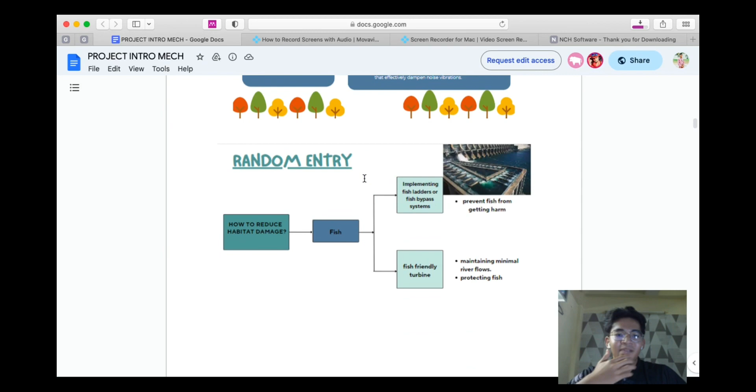For the random entry, we want to reduce habitat damage, so we want a fish friendly turbine to protect the fish and environment, and we want to maintain minimal river flow. We also want to implement fish ladders or fish bypass systems because it will prevent fish from getting harmed.

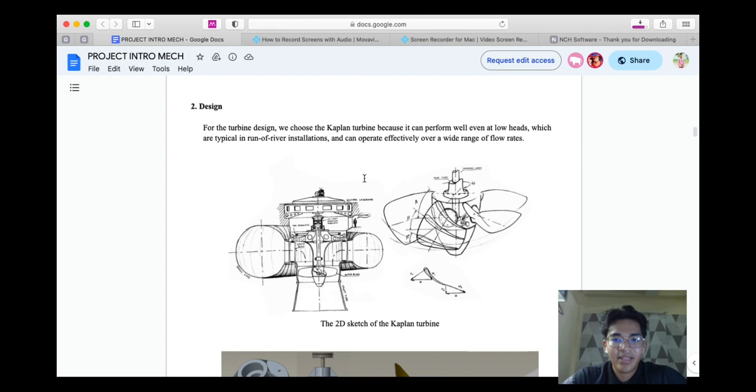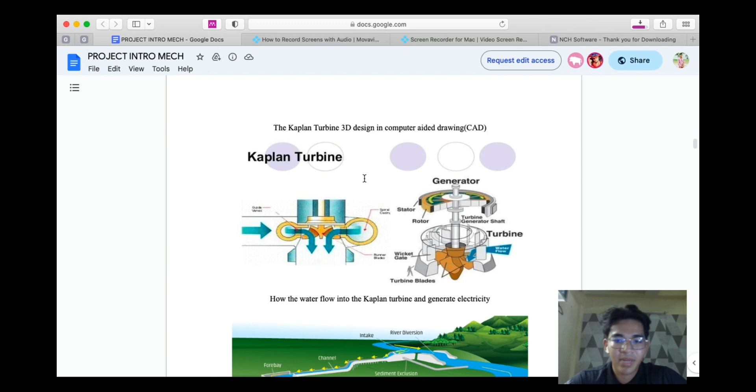So the fish will not go near the turbine. For the turbine design, we choose the Kaplan turbine because it can perform well even at low heads, which are typical in run-of-river installations, and can operate effectively over a wide range of flow rates. This is the 2D sketch of the Kaplan turbine, and this is the Kaplan turbine 3D designed in computer-aided drawing. As you can see, this is how the water flows into the Kaplan turbine and generates electricity.

This is the run-of-river system. Run-of-river hydropower plants harness the kinetic energy carried by water using the natural downhill flow of rivers and micro turbine generators. The turbine we have chosen, the Kaplan turbine, will be used in this hydropower plant system. We chose the run-of-river system because it will help us more and make our project more efficient.

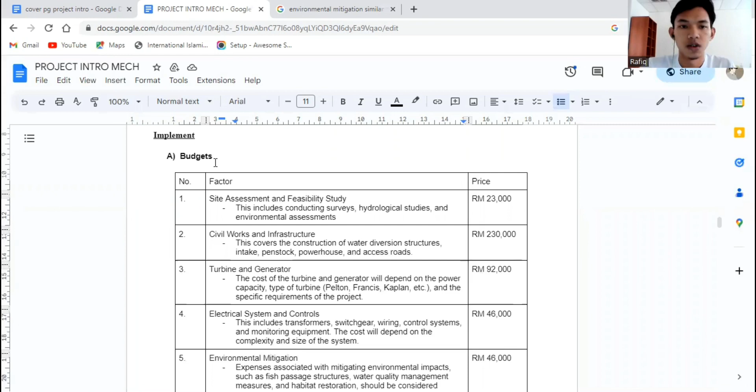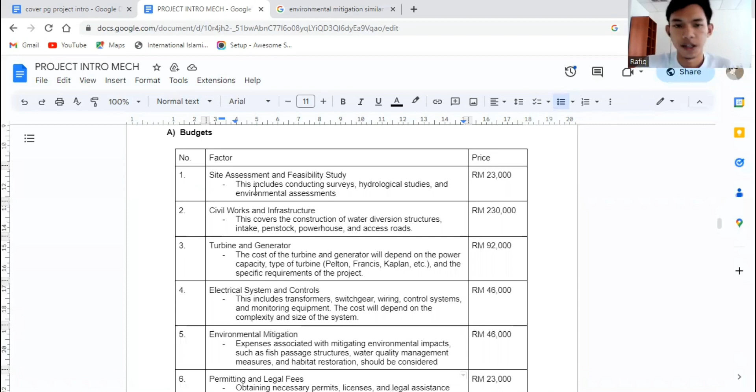Now I will explain about the implementation. My team has considered certain things. First is budget. For our project, a hydropower plant system at the waterfall, I have decided on 6 factors according to the budget. The first factor is site assessment and feasibility study. This includes conducting surveys, hydrological studies, meaning the study of the amount and quality of water stored on the land surface, and environmental assessment.

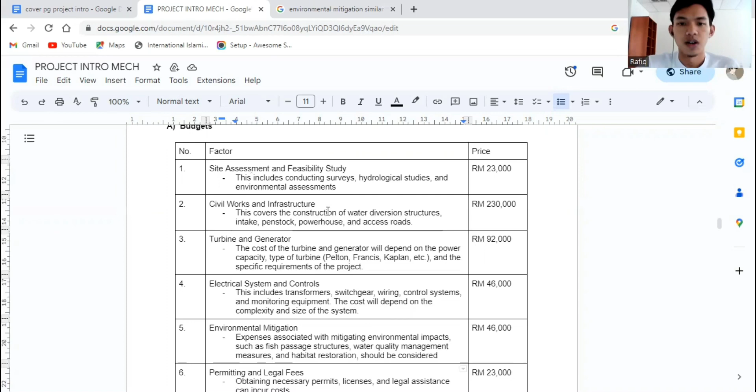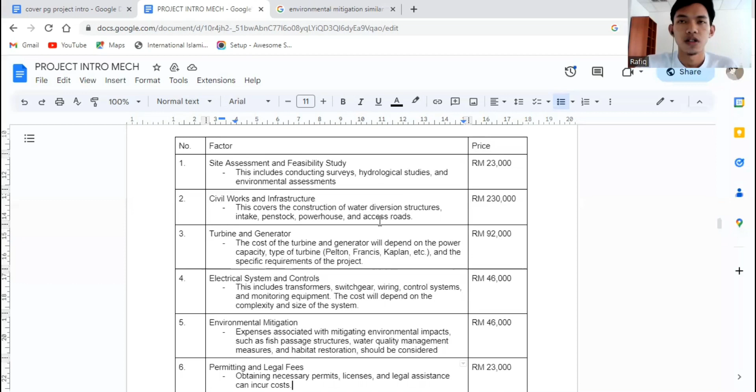Next factor is civil works and infrastructure. This includes descriptions important to the hydropower plant system, which are the water diversion structure, intake, penstock, powerhouse, and access roads.

of the budget that we consider is turbine and generator, which is an important thing also in hydro plant system. The cost of turbine generator will depend on the power capacity, which depends on the area that we decide to build the hydropower plant. So if we decide to do it at a small area, the cost will decrease.

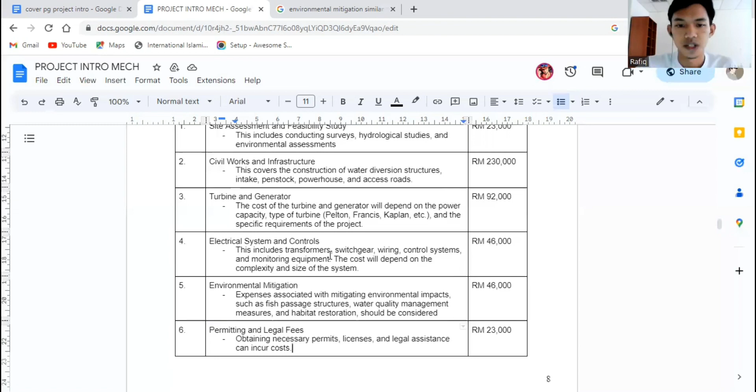The next factor is electrical system and controls. This includes electrical components like transformers, switchgear, wiring, control system, and monitoring equipment. And the price is around 46,000.

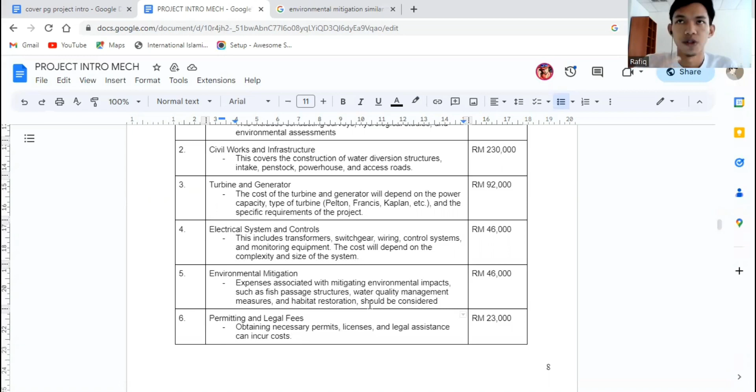So the fifth factor is environmental mitigation. What's the meaning of environmental mitigation? The project that we do is also to prevent any environmental effect and impact. We must do the project without destroying the habitat and lifestyle of the animals and plants. That also must be considered when building a hydropower plant system at the waterfall area.

So lastly is permitting and legal fees. This is the permit, license, and legal assistance that can also incur costs.

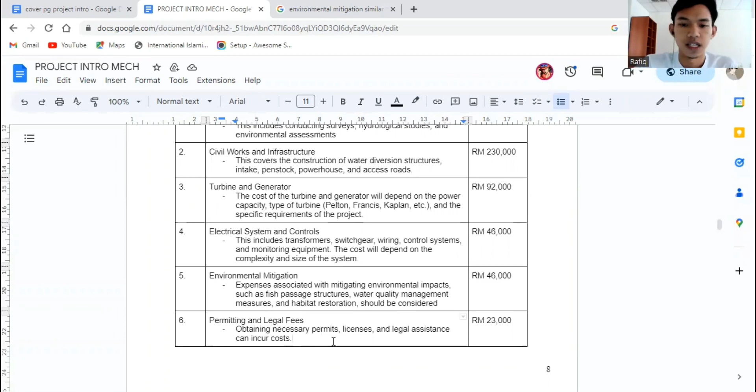Okay, so I continue with the second element that our group decided for this hydropower plant system project, which is testing. For the first thing, we measure the electrical system in our hydropower plant. The electrical system testing is to ensure the accurate installation of the hydropower system and also the performance of each component in the system.

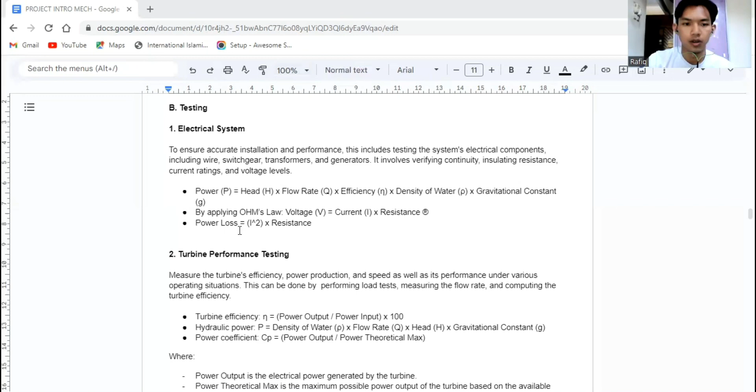So we apply the power equation, Ohm's law, and also the power loss equation. For the second test, we apply turbine performance testing. As we know, hydropower plant is very related to the turbine because it is one of the major components in the hydropower system. So in testing, we measure the performance of the turbine to know their efficiency, power production, and speed. We apply the turbine efficiency equation, hydraulic power, and lastly power coefficient.

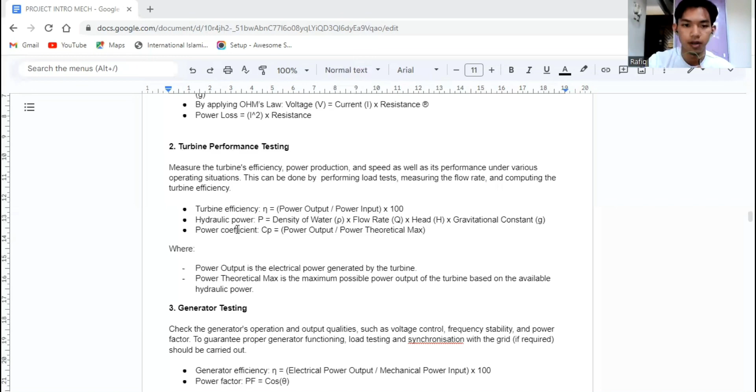Next, we also take the testing measure of the generator in the hydropower system. So why do we test the generator? Because to get the voltage control, stability of frequency, and power factor. So we apply generator efficiency and power factor equations here.

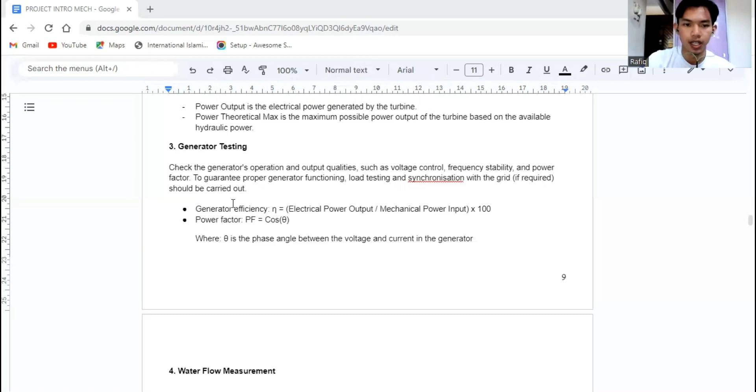Last but not least, we measure the water flow by using this equation. So why do we measure the water flow? Because we want to get the water flow rate that enters the system. By doing it, we can know the system is functioning within the predicted flow range and that the turbine is getting the necessary water flow.

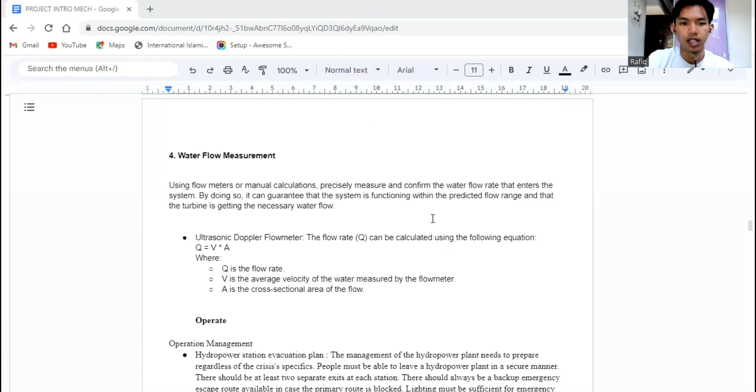Okay, that's all. Now I am going to talk about operation. From the aspect of operation management, a hydropower station needs an evacuation plan. The management of a hydropower plant needs to prepare regardless of the specific crisis. People need to be able to leave the hydropower station when there's an emergency.

So the next thing is training and operation. The first point is control risk management. The management of the hydropower plant needs to provide training for the workers so they are prepared if there is an emergency or hazard at the power station. Planning ahead to avoid workplace accidents, illness, or injury is a general strategy to prevent incidents from happening. So the management needs to ensure the work system and equipment are well maintained by the worker, so there's no accident.

The next point is safety application. There's a turbine speed control and brake system monitoring. It is essential to maintain the stability and efficiency of the turbine. The brake system is important if there is heavy rain or a drastic increase in water current flow. It is important to slow down the turbine to make sure it stays in a safe condition.

The next thing is the water level measurement system. Water level, flood, and evacuation alarms are essential for the safe operation of a hydropower plant. Any failure in the level measurement system will cause a big problem because it will endanger the crew and the environment around the hydropower plant.

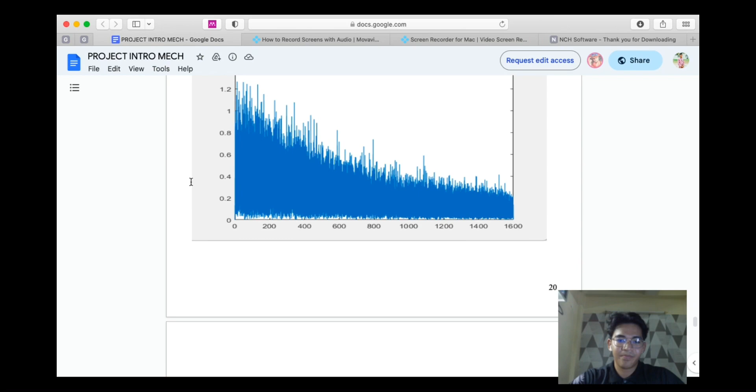Okay, from the graph we can identify some data and do analysis. For the spectrum analysis, it can help us identify some dominant frequencies, while time domain analysis allows us to evaluate the dynamic response over time. This information will guide us in the design and implementation of effective measures to limit flow vibration.

As you know, high levels of vibration can result in failures, loose bolts, loud noise, and fractures. High vibrations may also lead to health concerns, including fatigue, headache, and digestive disorder. So it will make the villagers unhealthy if the vibration is higher. So we want to limit the flow vibration using this data.

Okay, this is some prevention efforts that we found.

We need to routinely examine and service rotating machinery to guarantee appropriate balancing and alignment. We will use precision alignment methods and dynamic balancing of spinning pieces to accomplish this.

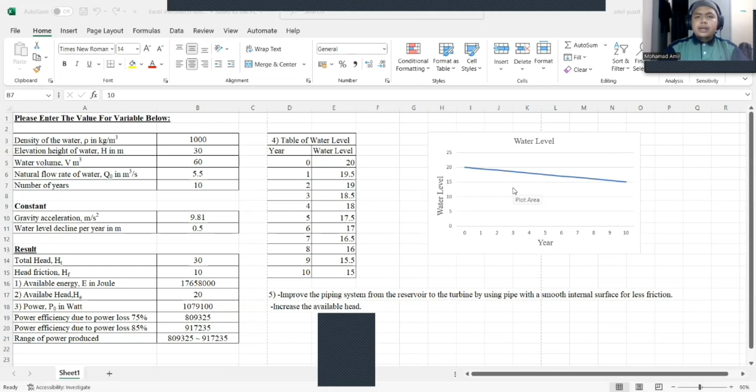So the next thing is the option of how we want to improve the power efficiency of the hydropower plant. We can improve the piping system from the reservoir to the turbine by using pipes with a smooth internal surface for less friction. And then we can increase the available head to increase the maximum output power from the hydropower plant.

So I will continue to the last part, which is part D, where the question asks to provide hazard identification and countermeasures to ensure the safety of your team during the task to investigate the water flow rate and potential head for the hydro system. From this picture below, I have found 6 hazard identifications and also their countermeasures.

The first hazard is using rocks for the workers to cross from one place to another. As you can see, there's the rock, there's no bridge for the workers to cross to another place to do some work or maintenance. So the countermeasure is to build strong walkways or footbridges across the nearby area or the waterfall. These structures should be created with proper handrails or guardrails for increased safety, be able to withstand the flow of water, and offer firm footing.

Next, the second hazard is scattered wire near the water area. This creates a possibility for the workers to get electrical shock because of it. So the countermeasure is the wire should be adequately supported and secured, by using strong poles, support structures, or a cable management system at the scattered wire.

After that, we move to the third hazard, which is there is no mark or cover for the electrical devices and potential power sources. You can see number 3 is near the cave. The power source may be inside the cave, and there is no mark or big sign assigned for the electrical location. So the countermeasure is to notify people that there are wires nearby and to prevent access to the dangerous zone, by creating large warning signs and barricades all around the area. People should be told to keep their distance from the potential hazards, which the signs should make clear.

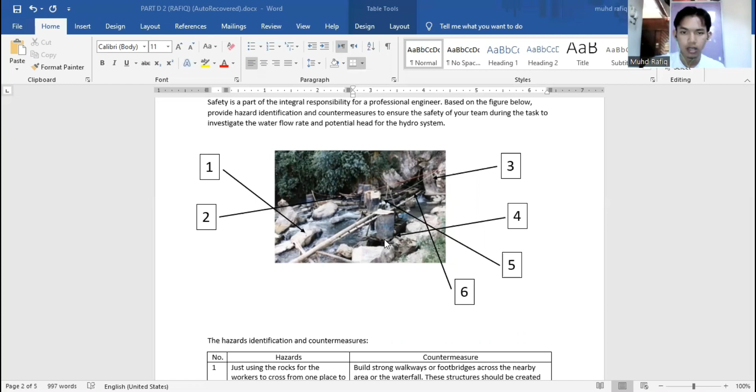For the fourth hazard, the base is unstable and not strong enough to support heavy objects. As you can see, there are a few heavy objects, and the base is too unstable and not too strong. Based on this picture, they just made the base from surrounding wood, so the base is not strong enough. To counter this, increase the base strength by adding more support structures to it. To improve stability and load bearing capability, this can involve setting up more beams, columns, or bracing.

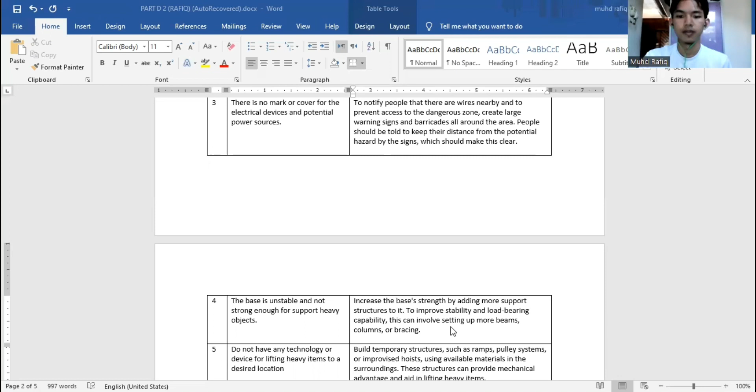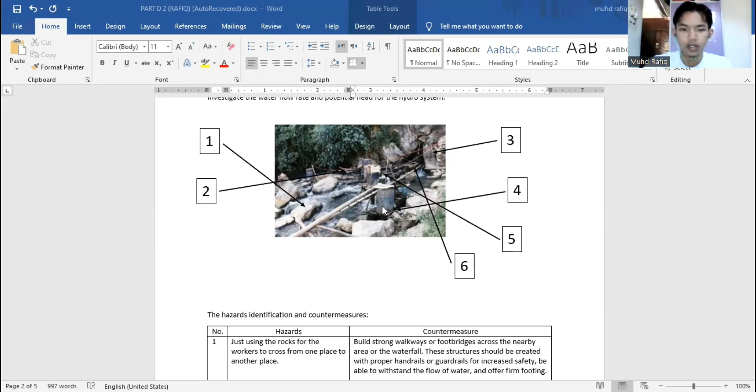Next hazard is not having any technology or device for lifting heavy items to a desired location. From this picture, we can see the workers may have difficulty lifting heavy things from one place to another location, which will affect the workers' back, an ergonomic factor for them. So as a countermeasure, build temporary structures such as ramps, pulley systems, or improvised hoists using available materials in the surrounding. These structures can provide mechanical advantage and aid in lifting heavy items.

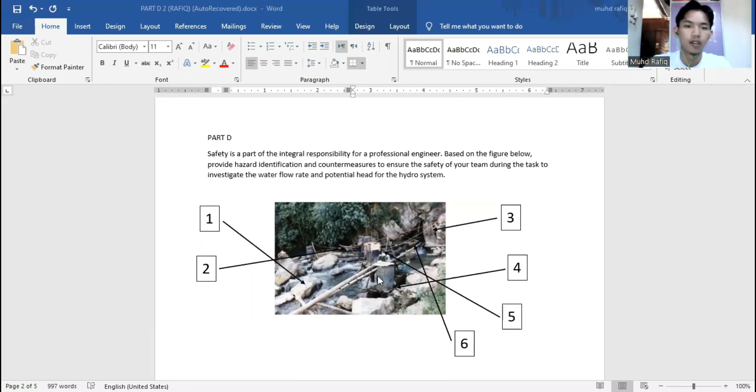And finally, available land is limited and unsuitable for use as the main location for a hydropower system. Yes, this is true that the location for this area was limited, unsuitable, and also unsafe for doing this hydropower project at this area. So the countermeasure for it is to consider a hydropower system that uses run of river and doesn't require a large dam or reservoir. It still makes use of the available water resources while reducing the amount of land required for construction.